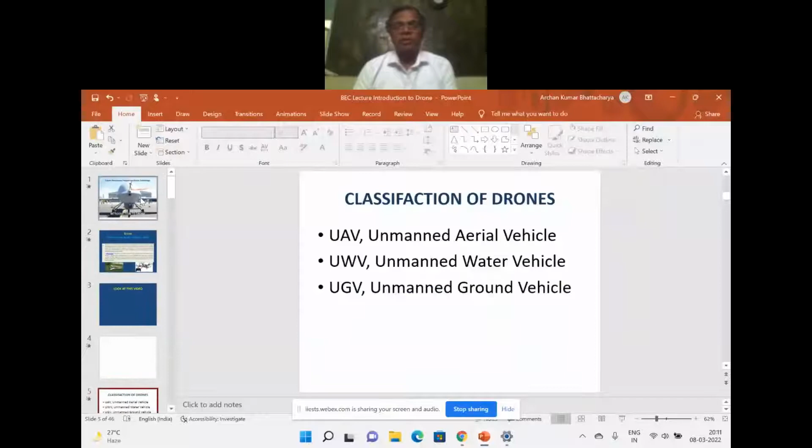Okay, thank you. Am I visible through the PPT? Yeah, sure, it's okay.

Good evening to everyone in this forum, those who have joined today. At the outset, I must convey my heartiest congratulations to all the faculty members of the Mechanical Engineering Department on the occasion of the Centenary Celebration. I also feel proud and honored to be one of the fortunate ones to be part of these lecture sessions. For this, I thank the head of the department and all other department members for giving me an opportunity to talk to you all on this forum, on this platform.

I will be touching on the basics and introduction of drone technology, and then talking about why we should learn or adopt this technology right now, because this is the right time. This is not only for mechanical engineers, but for all engineering students - not specific to mechanical, aeronautical, or electronics. As I carry on in my lecture, you will find that every student, even IT students, can benefit from this if they take it as a profession.

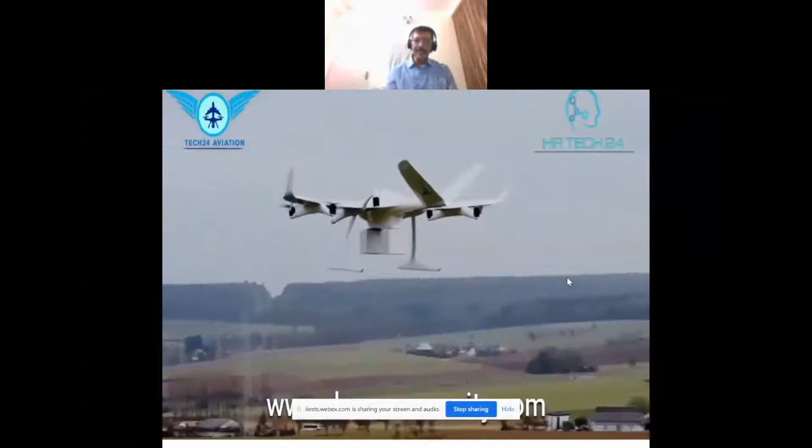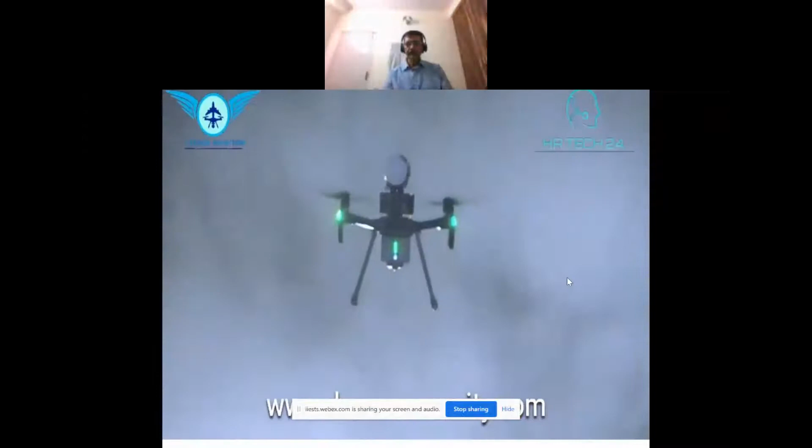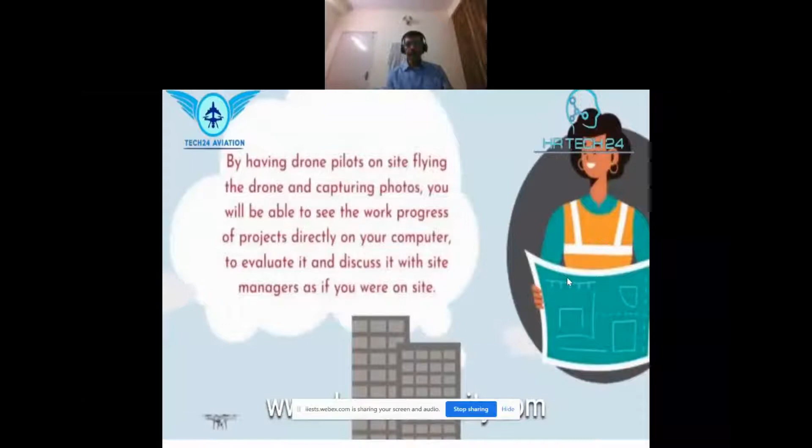Okay sir, with this short video, I will now start.

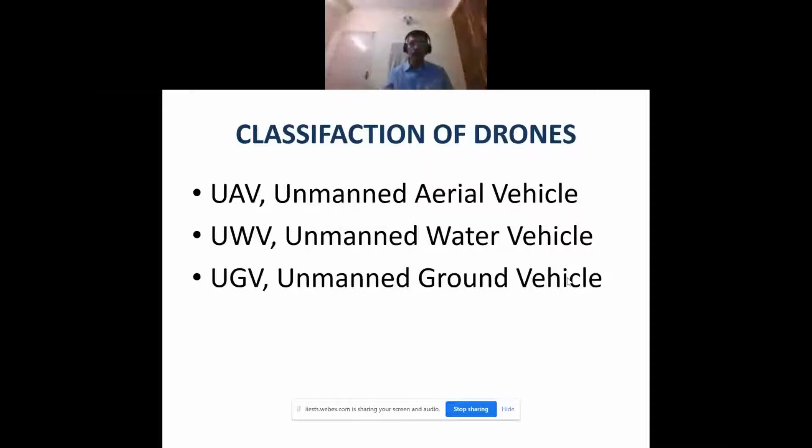Drones are basically classified into 3 vehicles - aerial vehicle, water vehicle, and ground vehicle. I will be talking only about UAVs, unmanned aerial vehicles. The water vehicles and ground vehicles are in a different shape and form, but UAVs have gone slightly ahead of the other two.

Now I come to the definition, which is why it's called unmanned aerial vehicle. It's just a normal aircraft which can fly, or hover, meaning helicopter, and does not carry any human on board to operate or carry various payloads. The payloads, in case of defense services or the air force, means the weapon, or in a transport aircraft, loads like army load carried from one place to another, or even human beings. This is called the applications of the UAV.

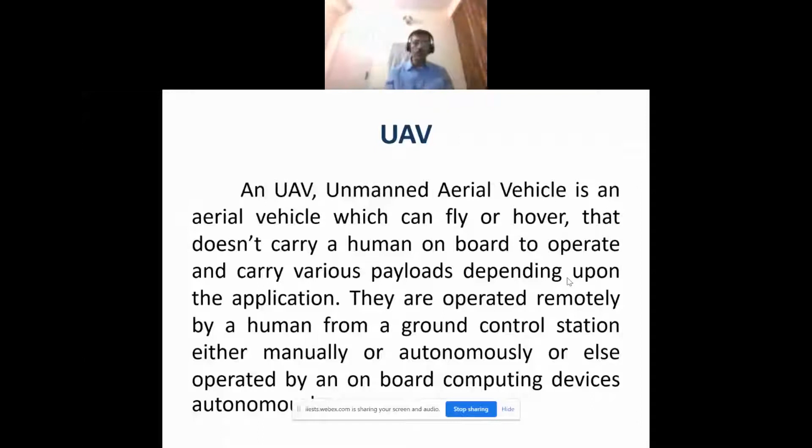They are operated remotely by a human being, basically from the ground control station. This can be manual, that is line of sight, or it can be autonomous, like planned so it follows the flight path and comes back, or operated by an onboard computing device autonomously. This is what is presently or commercially being used.

When we get into classifications, it is basically a category of designs, category of performance, that is what is the range and altitude, based on DGCA, that is Directorate General of Civil Aviation. These are only guidelines for the total aviation field commercially, not for the defense services.

The drones also have got guidelines very recently. I was also involved in making this draft, a new draft, because otherwise drones were flying all over the country illegally. This has now been put into shape through the DGCA guidelines, also based on size and weight, and based on application.

Like, what are the applications? I have already mentioned the payload, and it's also based on the propulsion system. I will now slightly discuss the categories in detail.

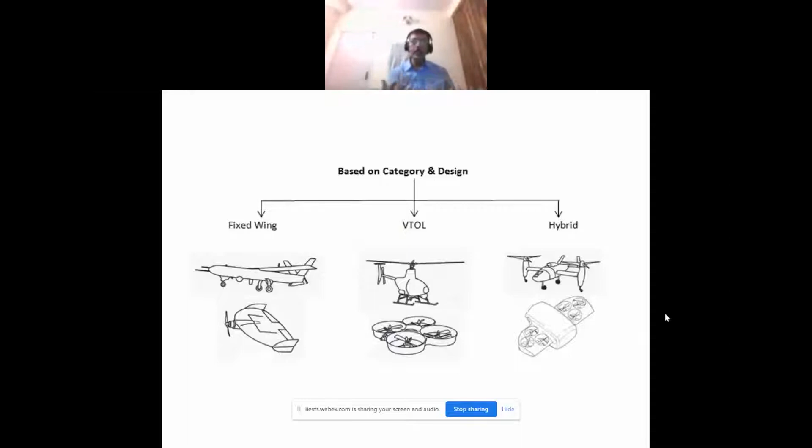Basically, we have two categories: fixed wing and VTOL. In case of aircraft, we have very few that are hybrid, but in the case of drones, we have mostly gone for the hybrid, that is, it has a fixed wing and can go for long endurance and long range. Another popular type you've seen is the quadrocopter, which works on the helicopter principle.

Then it comes to performance. There is high altitude and long endurance, with high altitude, long endurance. This is basically used for ISR, like intelligence, surveillance, and reconnaissance, used for defense purposes.

Similarly, we have got medium altitude long endurance, medium altitude medium endurance, and low altitude. This last one is what is right now being used most, because these are the smaller aircraft used for different commercial purposes.

Then what is the DGCA classification? DGCA has made it as per the weight of the drone. There's nano, that is less than 250 grams. You must have seen many of them, and aerobatic shows also coming in, they're all nano or micro level, that is less than 250 grams.

Then based on applications. This is basically now where we get into the business, that is, the governmental part and the non-governmental part. Till today, for all the governmental needs, as India produces very few UAVs or drones, we have been getting them from different countries. That also I will discuss.

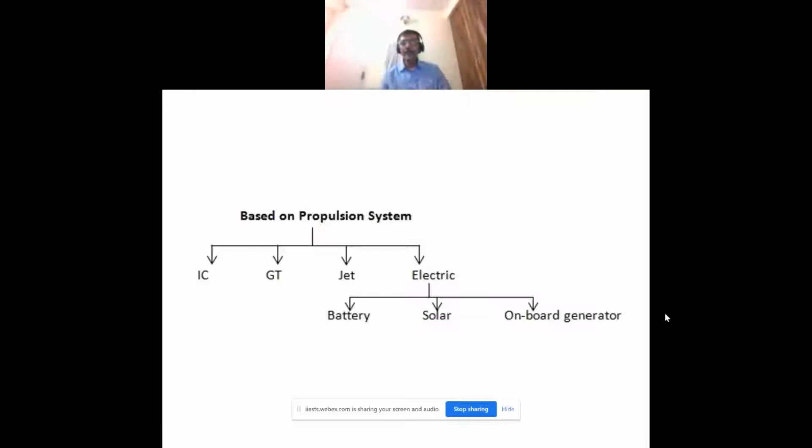Now, based on propulsion, I don't think I need to explain IC engine, gas turbine, jet engines, and electric, that is battery, solar, onboard generators, for engineers this can very easily be understood.

Now, what is UAS? It is the total system: the UAV, the aircraft, the ground control system, and the UAV operator, who has to be a pilot license holder and has to be DGCA cleared for drones. For defense services, it is also a pilot. For commercial purpose use of drones, one also has to be a pilot license holder with DGCA clearance. So this is what the UAS system is known as.

So the basic anatomy is again like a typical aircraft structure: power system, the flight control system, and the ground control system. All these things are involved. Now, here's the basic drone anatomy. I've shown it as one picture so people can understand what a drone looks like.

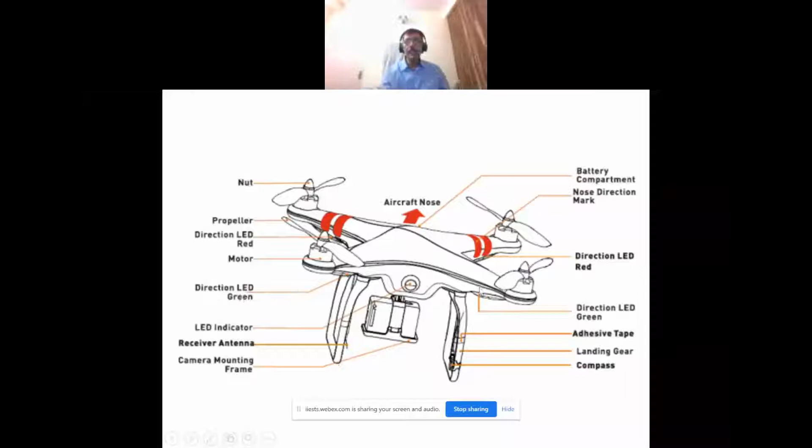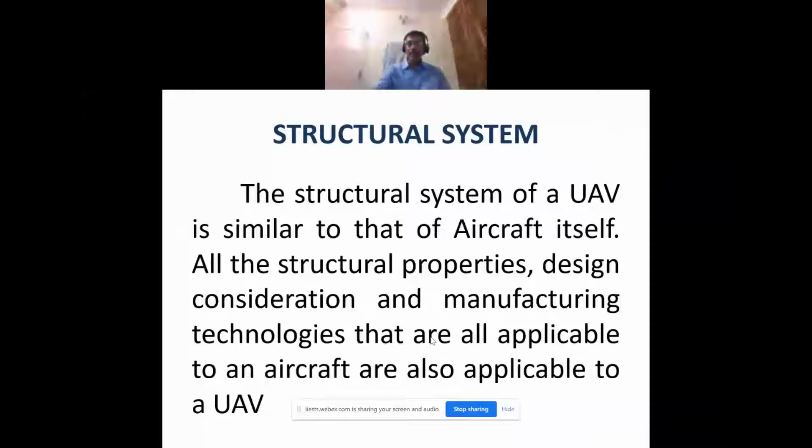Now it's the structural system, just like an aircraft, as I said. The structural properties are designed because it has to withstand the air pressure - the lift and the drag principle. So the design depends on the size of that drone or UAV, whatever you call it for your purpose. The design is similar to aircraft structure, and whatever we apply there applies in the case of UAV or drone also.

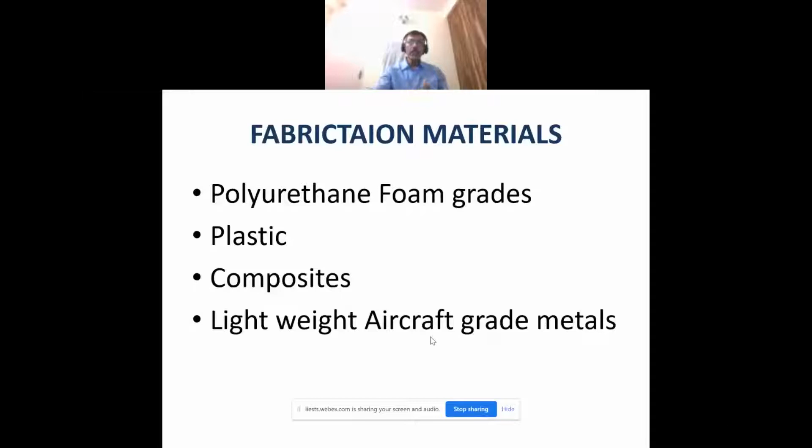The materials used in case of drones - but aircraft is basically composites and lightweight materials. Here you could use polyurethane, depending because you are reducing weight, and kinds of plastics. But today nanomaterials are also being used in this concept. There are very nano drones coming with artificial intelligence. You must have seen this in many videos or movies.

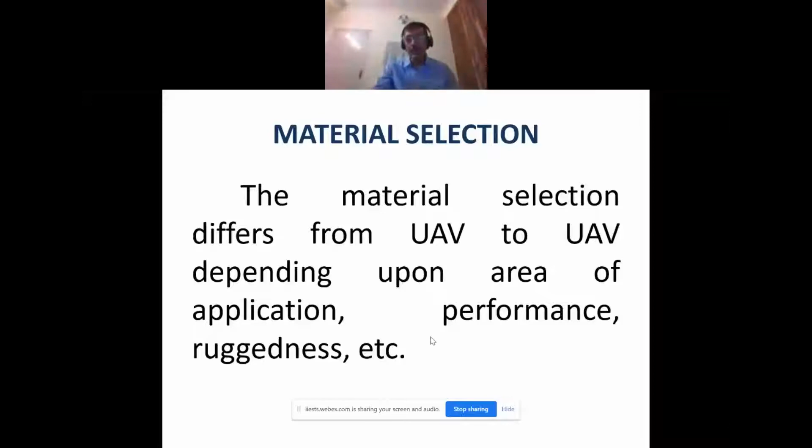The material selection also depends on what kind of drone you are asking for - is it just for filming or camera purpose? That's a different kind of smaller drone. If you are going for a bigger drone, then your material selection has to have aircraft grade material. So it all depends on what kind of performance, what kind of drone you want. Here you understand that engineering is involved everywhere - think carefully, even for a small drone, engineering expertise is involved.

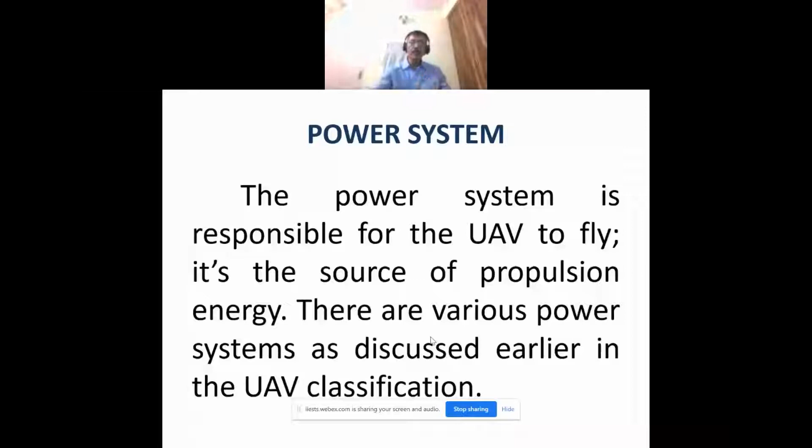The power systems again depend on what kind of power system - for smaller range you can have battery operated, and if you have a long range, you will have to have a propulsion system. You have available the jet system, you have available the rotary system, the propulsion. It again depends on your application, what kind of UAV you are asking for, and accordingly your selection of power systems - again aeronautical engineering, mechanical engineering, electrical, electronics, and also IT. Next you will come to know.

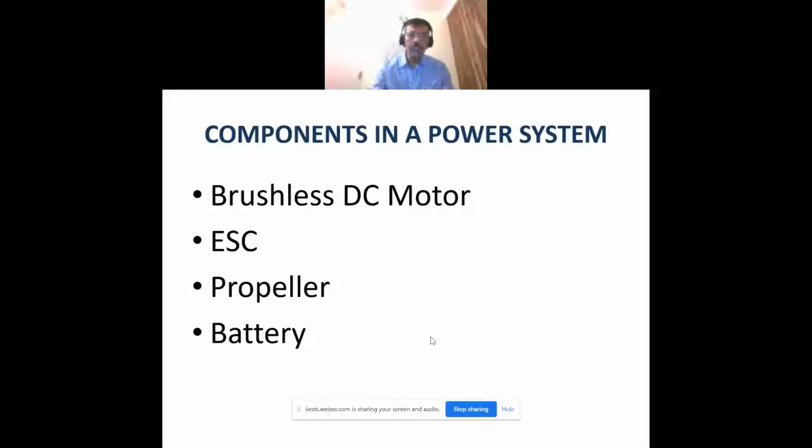This is basically a power system: DC motor, electronic speed controller, propeller, batteries - they are all required. Now the control system, it's just like an aircraft.

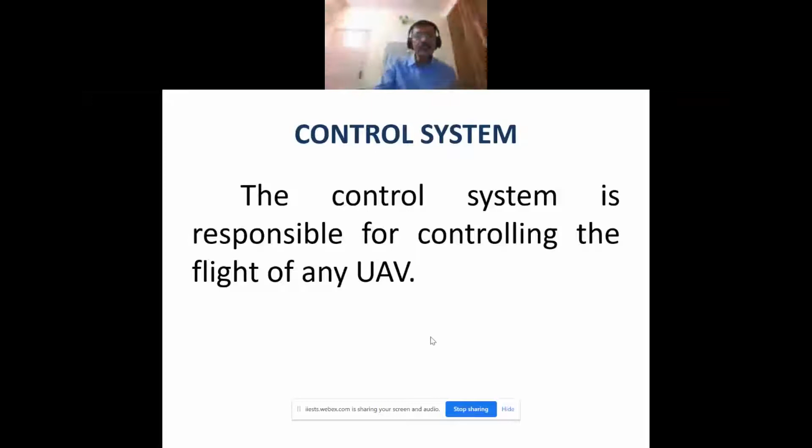The control system is also for flight path control. You have to have a system exactly like an aircraft system. You have an autopilot, but in a very miniature form. You have all the control systems, like wings, rudder, ailerons - everything like an aircraft system. They all have to be controlled for the movement of the aircraft, your right, your left, and for this you need all the control systems, controlled through a different system, like autopilot in case of aircraft.

This is the flight control system on board the UAV. It gets the command through the ground control system, and this flight can go for durations fixed depending on that. It can follow the flight plan with the flight control system, and then the aircraft comes back to its initial place, the primary place.

These are the main components in the flight control system: the inertial measuring unit - in aircraft we call it the inertial navigation unit. This is basically a combination of an accelerometer and a gyroscope. It gives you the position of the aircraft. Then GPS with magnetometer, and the power distribution board - these are all the components.

I'm going to the basics; I'm not going into the design part of it because that is not our main motto today. These are the sensors: accelerometer, gyroscope, barometer, magnetometer - they are all required in the IMU, the inertial measuring unit. Each has an individual role, and it controls the aircraft position, aircraft altitude, range - everything is controlled by this.

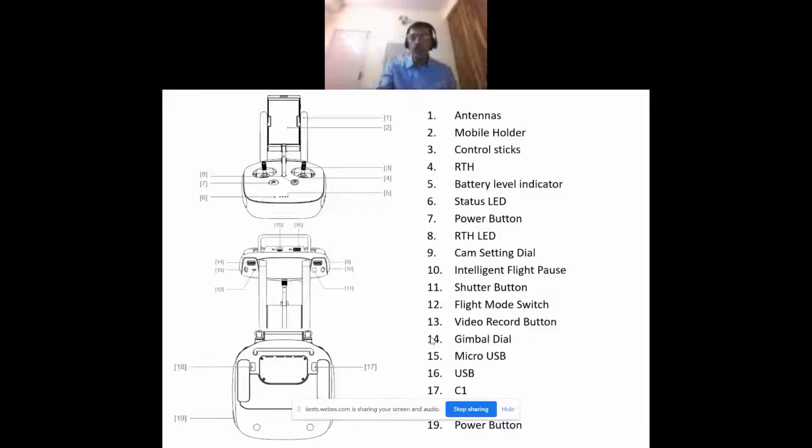Now I'm just giving you the basics of how that quadcopter, with four blades and four rotors, flies. Some of you may be wondering—basically maybe as initial students when we did mechanical engineering, we didn't know how an aircraft flies, the lift and drag. Of course we were taught this later, third year, fourth year, but these are the very basics. The helicopter dynamics are totally different from a normal aircraft. And here the quadcopter, you must have seen in many movies, is very fondly seen everywhere today.

So basically, you don't have to worry right now, neither are you going to operate straight away. All this is taught in the courses, so just don't worry about this part. Now I'm coming to the main part of it.

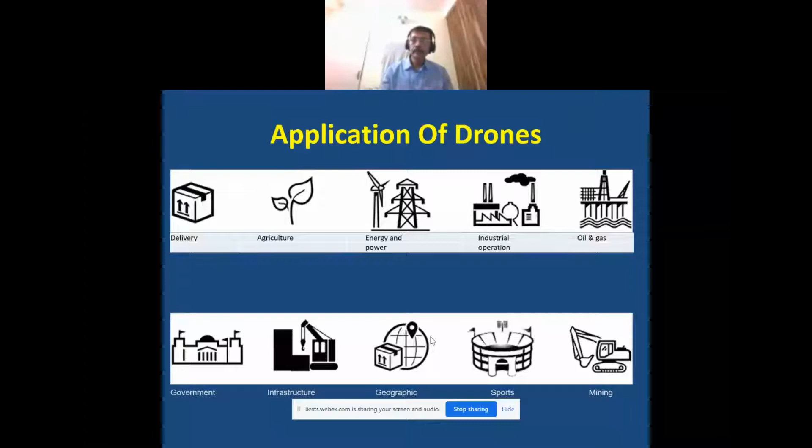These are kinds of applications - it's just a pictorial vision so you can realize. I'll talk about delivery, agriculture, energy, power sector - how drones are used for windmill operations at such huge heights, industrial operations, oil and gas especially ONGC drones, governmental use like police force and paramilitary force besides defense services. Infrastructure uses include geographic mapping, sports stadiums - even recently concluded Olympics show how drones are used - and mining. There are a few sectors I've just shown.

Now I'll go into the applications in slightly more detail. Basically aerial photography is popular with drones - like wedding scenes you've all seen, filmmaking, special events like cricket games or any function, covered through journalism. Agricultural applications also require aerial photography - for locusts and insect attacks, they can photograph the area to identify which area is affected, so you can take preemptive action to divert that in the agriculture field.

Commercial inspection service - like bridges, think about a tower or any high towers you have to inspect. Think about our second bridge today - you have to do an inspection. The old methods involve bringing a steamer boat and climbing onto the structure to have a look. Today it's all done through drones with high power cameras. You can inspect high altitude TV towers and wind turbines - if you go to the Kanyakumari site there are hundreds of wind turbines, all being inspected right now using drones, but only a few are available, and they are all imported drones.

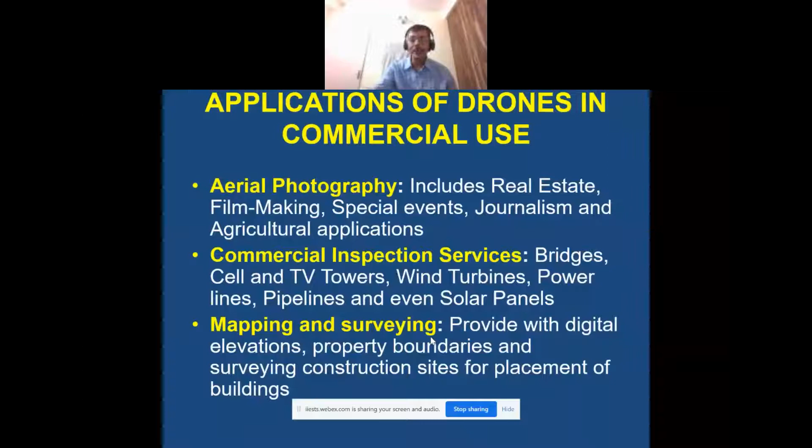Mapping and surveying is very important - every Zila Parishad, Gram Panchayat, everybody is asking for this. I've gotten a lot of offers from different states asking if we can do this mapping, since there's a lot of confusion or disputes. Property boundaries is a very important service. I'm stressing this so you understand the requirement first - only then will you start thinking about whether the demand exists or not.

The first food delivery, especially for you all in a remote area, coal mines area, asking from Domino's pizzas or whatever. Today they already started abroad. We started using it, and India is just knocking at the door. They are going to come. So the package delivery is there.

I've taken Australia as a postman example. Now Amazon is in the business already, and abroad Amazon has started off as a trial basis because they themselves want a fleet of drones. They have talked to various people, and Amazon is going big way for package delivery to the remotest areas. So the demand is fantastic, and in India, Amazon business is increasing. Flipkart, Amazon, all these businesses increasing. So you can think where the growth of this particular business is, and emergency medical supply.

I have got n number of videos of how people are saved by sending medicines at a remote area at the right time. You want to send it, you can send it. Just a phone call, the drone is ready. But how will the drone be ready? It will not be available everywhere. That is also another technique I will talk about.

Residential home inspections, as I already mentioned, structure damage, interior, exterior damages.

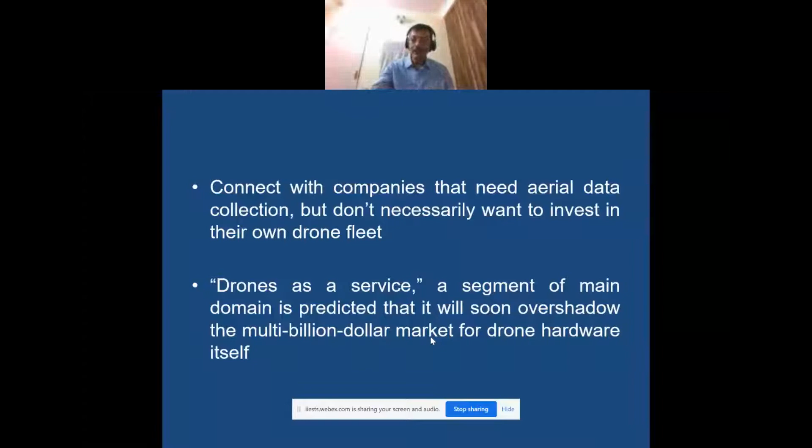Drone as a service, the segment of this main domain, is predicted that it will soon overshadow the multi-billion-dollar market, and I'm sure it is going to happen very soon. It depends how we take it.

This is one example - a US-based company, Skycatch, is one of the companies running this drone service right now, like a hire car. You call them up, they supply the drone with the operator and all the ground control system, and you tell them what the job is. The relationship manager's job is that by the time you state your requirement, you don't have to worry about what kind of drone, like a mini car or a sedan. It all depends - the basic goal is to make it easier for companies to afford that.

This is an expensive technology. Everybody cannot buy it, so you have to make them understand the process and help independent operators too. You have to have an operators group to operate that kind of drones.

At present, there are very few courses run in our country, and in Bengal right now it's just not there. I'm trying to push it through different angles - how can we introduce these drone courses?

One is a pilot training course for drone operation. Now, so many pilots and so many drones are there - who is going to do the operation and maintenance? It's like aircraft - there are pilots, and there are the engineers, like ground engineers, who maintain the aircraft to keep it ready at any given time. So maintenance people are going to be involved in a big way.

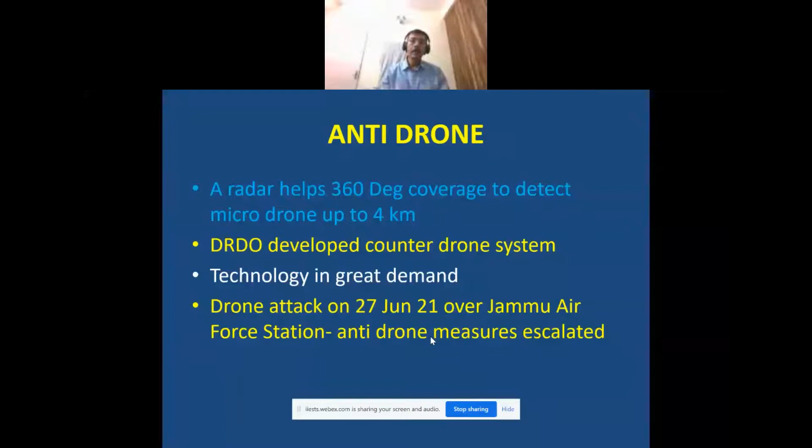All this became clear in India after the drone attack last year on 27th June over the Jammu airbase, when we never expected such an attack to happen early in the morning. So now anti-drone systems have already been placed in different vital installations, and this is how the market is going to develop.

I think I have finished, and I will be ready for some questions, answered to the best of my ability.